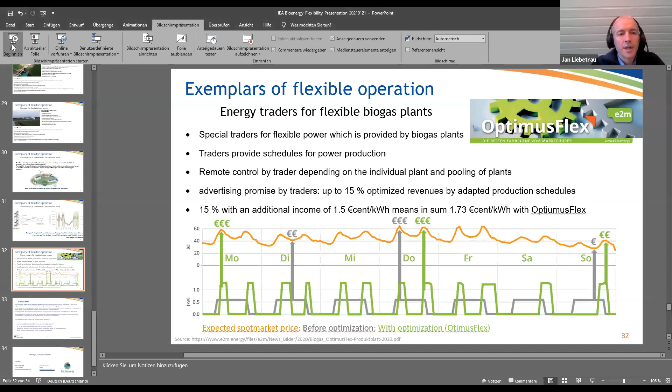Thank you very much, Jerry, for this introduction. And as already said, the idea today here is to present the report which was just mentioned. And first of all, I would like to thank all the authors of the report. Of course, it was not only me, I was leading the task, this is right, but Peter Kornatz from DBFZ, and Urs Baier from Switzerland, and Jerry and David from Ireland as well contributed to this report. It is about integration of biogas systems into the energy system.

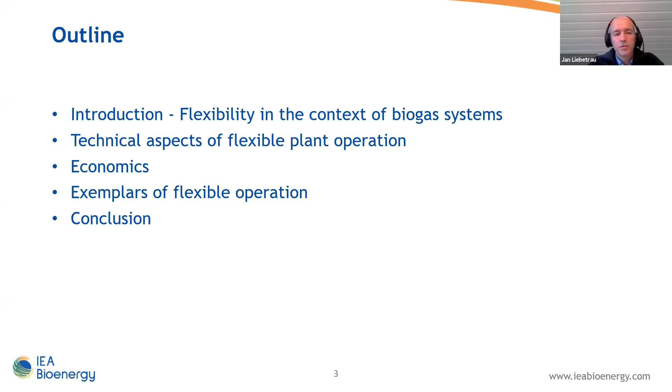And my task here today is to introduce to you the flexibility of biogas systems. So this is mainly flexibility of electricity producing biogas plants, so you have a CHP on site. And Jerry then will give the second presentation on power to gas systems. I would like to talk today about technical aspects of flexible plant operation, economics, examples of flexible operation. And of course, at the end, there will be some concluding remarks.

Why would you actually try to flexibilize a biogas plant? In the past, they have been built to have a stable, constant, stationary operation. However, the energy system is changing a lot, with more and more wind and solar in the energy system. We have a fluctuation of energy production. On the other side, we also have a fluctuation in demand. And to match this, we need flexible energy supply. And biogas can do that, unlike wind and solar. And I think this is a task for the future, that every energy producing unit has to adapt to the demand and the production in the grid.

A second option is the direct supply of a fluctuating demand of industrial facilities or other energy customers. In particular, in areas with an unstable grid situation, biogas could function as a standalone solution. And then you have to adapt to the needs of your customers or your industrial facilities. Just for the biogas plant itself, it's always good to have a shutdown scenario or even a reduction of your load. In case of maintenance, for instance, it is good if you can safely steer the capacity and the load of your plant.

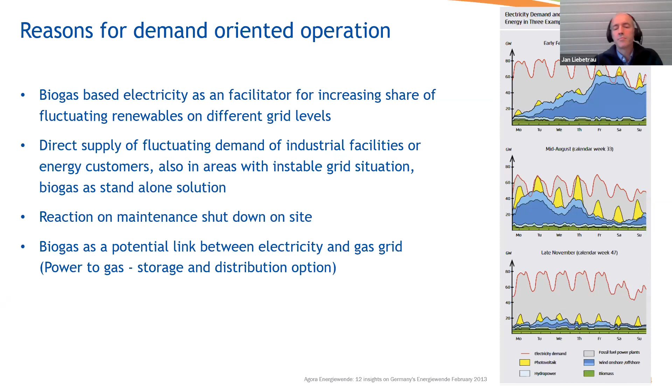And last but not least, I already said a little bit about this. We have power to gas as an option. Then biogas can function as a link between electricity and gas grid, but Jerry will look at this later.

When we go for electricity, we have different demand levels, different demand curves. If you look at the grid, of course, as already mentioned, we have wind, solar into the grid. And then, depending on how much you have this in your grid section, you might have a completely different load on the grid. And grid operators have to respond to that. And biogas can help support grid stabilization in such cases.

On the other side, of course, there's the electricity market. And this market follows these fluctuations, and the price will follow these fluctuations as well. So it's also interesting for electricity producers to produce electricity in times where the price you can obtain is high.

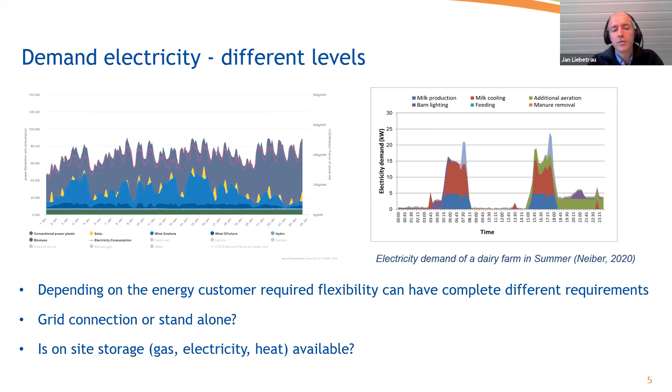And this is, of course, if you have a heat customer, a challenge to combine your flexible electricity production and this heat demand. And this is one of the tasks, if you go for flexible operation, that you combine it.

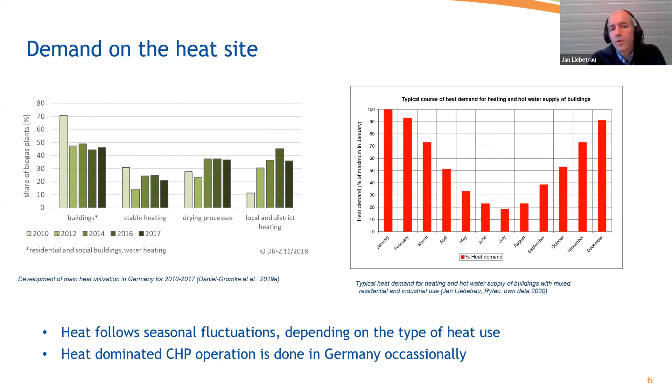On the other side, the seasonal heating scenario also offers you the option to optimize your revenues. If you produce more electricity in the wintertime, for instance, then you also produce more heat, and then you can sell more heat. And this might also be a way to optimize your revenues.

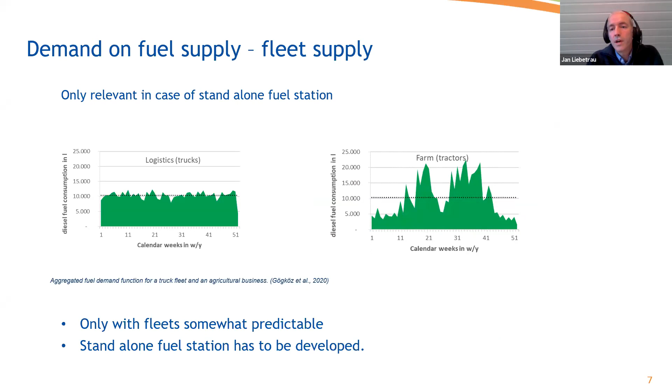Last but not least, if you have a standalone fuel station, you might also have a certain fluctuation. As you can see here, if you fuel a logistics fleet, then it might be quite constant depending on the fleet. But if you fuel, for instance, farm operations, larger farms, then of course there is a highly seasonal fluctuation, and you need to cover that with your gas production.

Summing up all these demands, in order to meet this, you need to install a certain overcapacity at your plant. Any flexibility means overcapacity in order to have times of lower production and times with higher production. And that also means idle capacity for periods of time, which means additional costs. So you have a higher technical effort because you have to organize these fluctuations, and you have idle capacity, and you need to be aware that your benefit from the flexibilization needs to balance out these additional costs.

The standard procedure for flexibilization of a biogas plant is usually the increase of the CHP capacity. Take care that your grid operator agrees to this and allows the grid access in the same order of magnitude. Increase of gas storage capacity in order to balance the changing gas utilization rates. You might also look into control of biogas production rate. I'll talk about this a little bit later.

Additional options to improve your flexibility are power to heat. Of course, the most flexible way is producing biomethane and feeding it into the grid, because then you completely separate gas production and gas utilization. And last but not least, power to gas, which will be a topic later on.

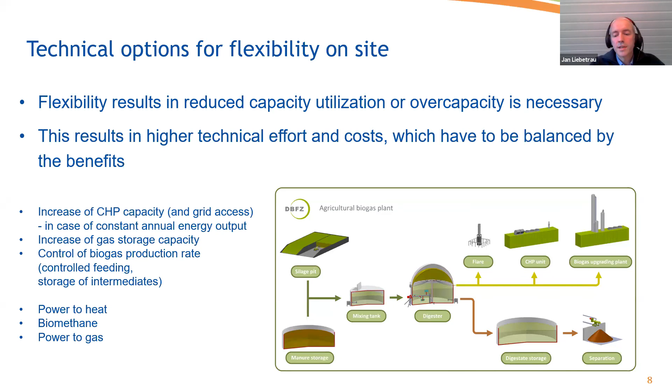The other way of flexibility is that you really react to the change in the market or in the grid situation, depending on what your target is. And then, of course, you need first of all a prognosis, somebody who will tell you how your energy provision should look in the next hours, the next days.

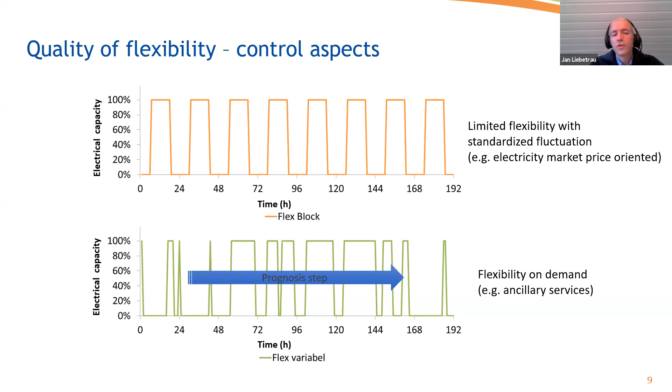And second, you need quick, fast, in best case even a remote control of your plant in order to respond to these prognoses. And here different operation modes, different scenarios are compared. The first one, the weekly schedule, is very simple. So you set on Sunday how you will operate next week, and then you can actually fulfill the requirements of markets, which are named here, day-ahead market, for instance, ancillary services. And your technical effort and your control effort is, in such a case, quite low.

But of course, this also means that you cannot really produce the electricity at the best times, and therefore the revenue will be lower than in the very right option here. This would be real-time control. Then you could even optimize your energy production during the day. You are able to take part in all markets, not simply the day-ahead market. You can even go into the intraday market, and you have the full range of ancillary services. Then, of course, you need remote control. Technical effort has to follow this, and your chances to gain money from that, to increase the revenue, are highest with such a system.

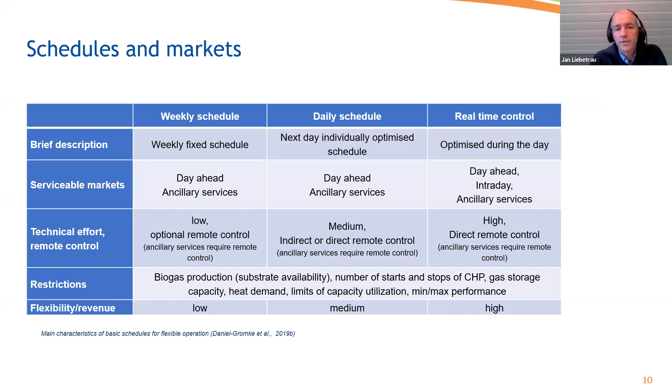Technical aspects, of course, include the capability of your CHP to run flexibly. And in the past, as I already said, producers looked at a constant operation. Now they have to actually facilitate part load operation or standby start-stop operation. And as you can see here, there are some requirements to the CHPs, but I can say that the producers very quickly adapted to this new situation, and they improved the starters, for instance, or they adjusted the startup procedure in order to be very fast online with the machine, so this has changed a lot. And if you buy a new unit today, you can be sure that most packagers will offer you such flexible operation packages.

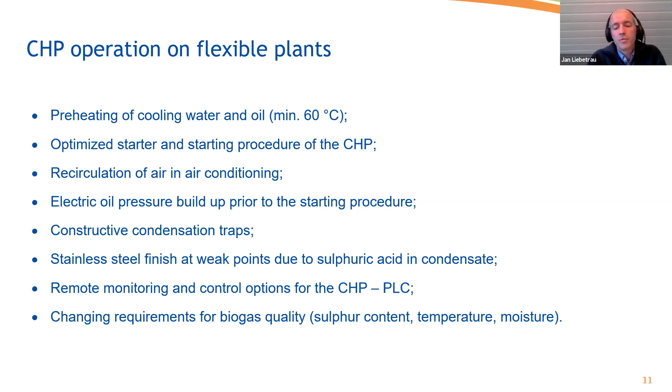When you look at CHP operation, some people might think, oh, I go for part load operation because then I don't have the start-stop issue. Then you need to be aware that the efficiency actually goes down quite dramatically. And if you look at the sometimes very slim additional revenues you get from a flexible operation, you need to look at whether this is not even eaten up by your loss of efficiency.

Second point I would like to highlight here is that the larger the engine, the higher the efficiency usually is. So if you look into flexibilization, if you think about having 2 engines, for instance, instead of 1 large engine, then you need to be aware that these 2 engines will have a lower efficiency than the 1 engine. So flexibility might also mean that you increase your capacity, have a larger engine with a higher efficiency, and this might add to your revenues. Part load operation not only reduces efficiency, it also increases methane slippage. So also from the environmental point of view, part load is not a very good idea.

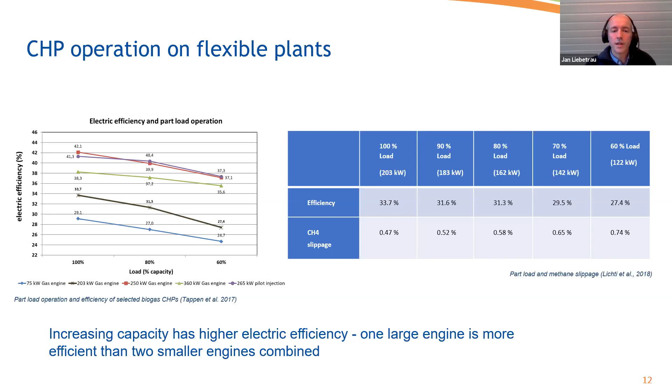When we step down in the production line to the gas storage, last was the CHP, now we go to the gas storage. The gas storage actually has the task to balance out deviation between gas production rate and gas utilization rate. In the standard stationary operation, this is not very difficult. The gas storage doesn't have to be very large. And everybody needs to be aware that the gas storage capacity is limited. However, in a flexible operation, the story is completely different, because gas utilization rate might all of a sudden exceed the gas production rate by a factor of 2 or even 3. It depends on how much overcapacity you have, or it might mean that you have no gas utilization at all, and all produced gas needs to be stored.

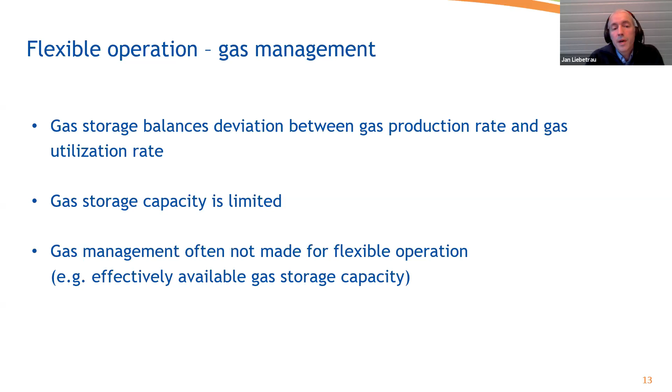At many plants which have been constructed for stationary operation, the gas management is not made for flexible operation, and it might need some upgrade in order to fulfill the demand. A very simple upgrade is, of course, to increase the gas storage. You might even think about additional clean gas storage. Very often the sensor systems for the measurement of the filling level are not very precise. So this has to be upgraded in order to have precise knowledge about available gas amounts.

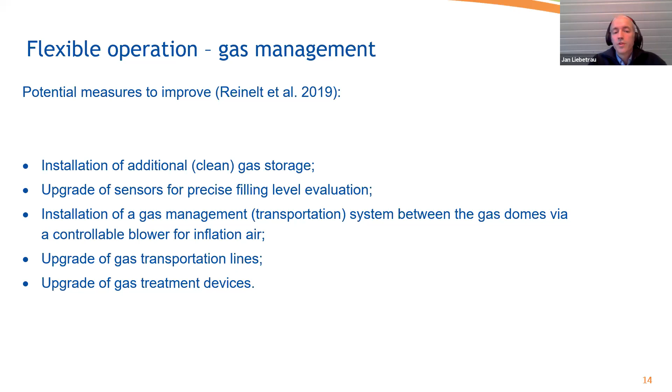Installation of a gas management transportation system between gas domes. If you have double membrane air inflated gas storages, then the gas transportation between these domes, if you have several of them, is not always 100% safe. So maybe an active gas transportation system might support there. Upgrade of the gas transportation lines in order to be able to run with the higher throughput, and upgrade of gas treatment devices, gas drying, for instance, or desulfurization. These units also need to be able to cope with the higher throughput.

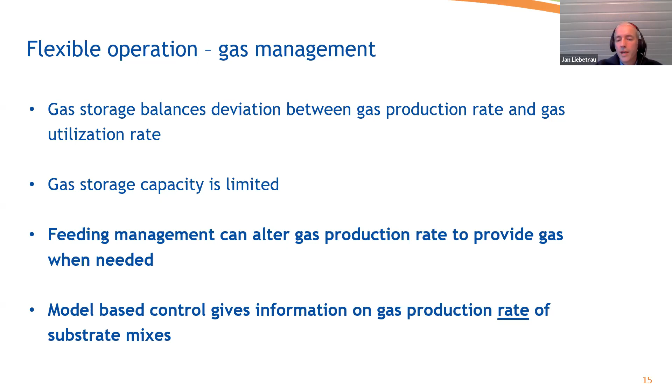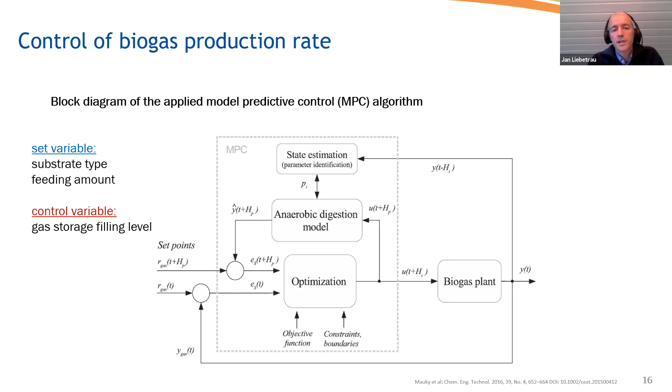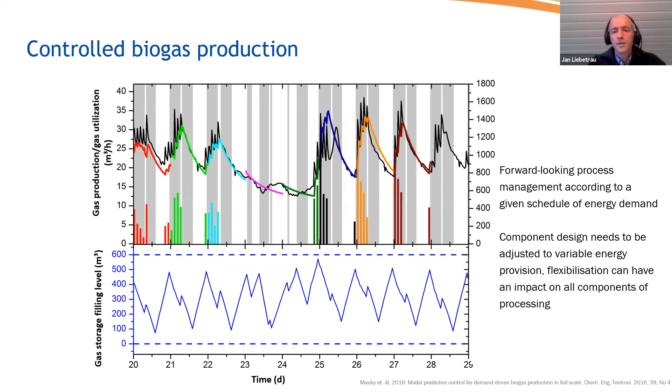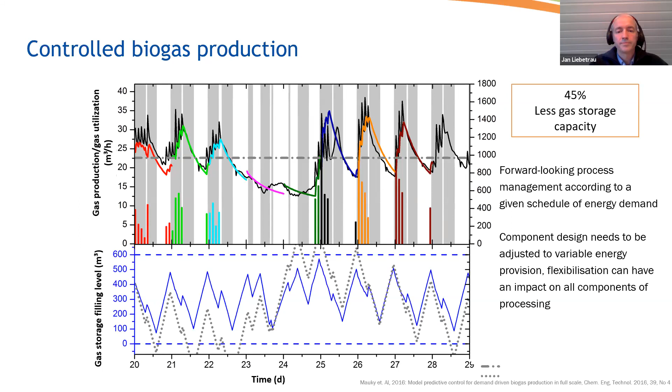And so this is going on day for day. You always have a prediction of 7 days ahead. And then the model also is comparing the actual gas production with what it has predicted in order to adjust a little bit. And you can see that the model was able to run within this boundary. Without the model, you see the dotted line here, then you would actually exceed the gas storage capacity. So you would not be able to run such a scenario with your CHP operation without this adjusted gas production rate.

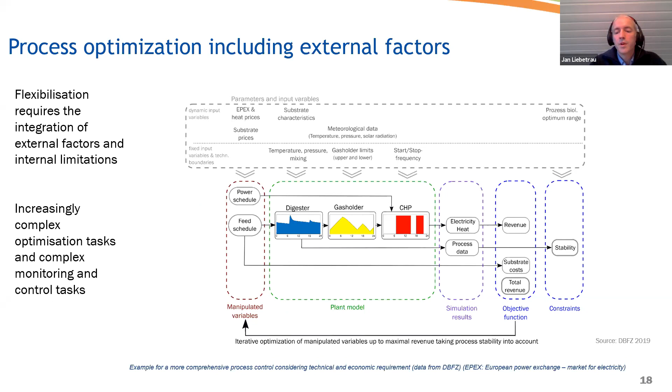If needed, or I think for full control of the overall plant, you would need also some additional variables to include in such a model. These are, for instance, substrate prices, also prices which you can obtain from the EPEX, so the electricity prices, heat prices, in order to be able to really estimate if your schedule is economically viable. So if you can actually gain profit from this, then the model, of course, needs to be much more complex and much more sophisticated.

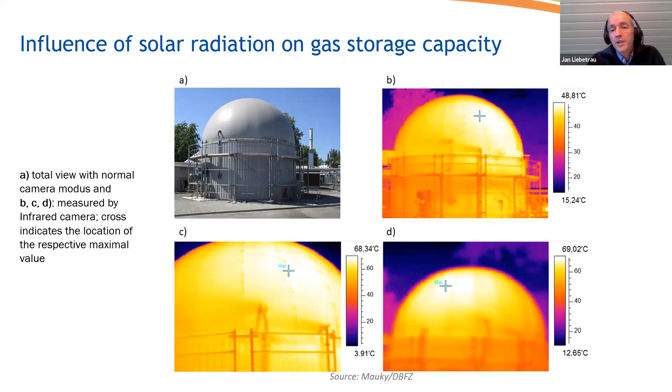One point I would like to take out here, and this is essentially the storage capacity. If the sun radiation on such a double membrane gas storage is quite high, then temperature can increase up to 70 degrees. We have tested this at this gas storage, which you can see here. And this changes, of course, the temperature of the gas inside. And if you have a change of 30 Kelvin in a day, then this can change your storable volume by 20%. This is not only due to the expansion of the gas due to the increased temperature, it's also the water uptake, which is much higher at increased temperatures. And you have to take this into account, of course, if you run your gas storage. Otherwise, you will have overpressure events and you will lose gas into the atmosphere.

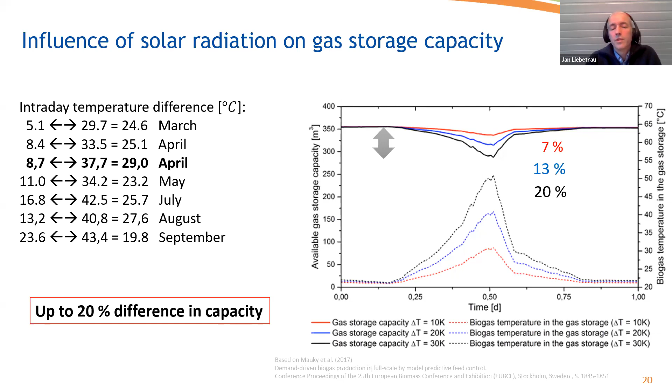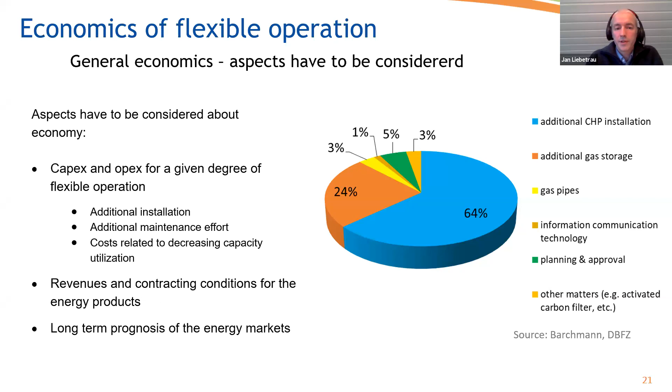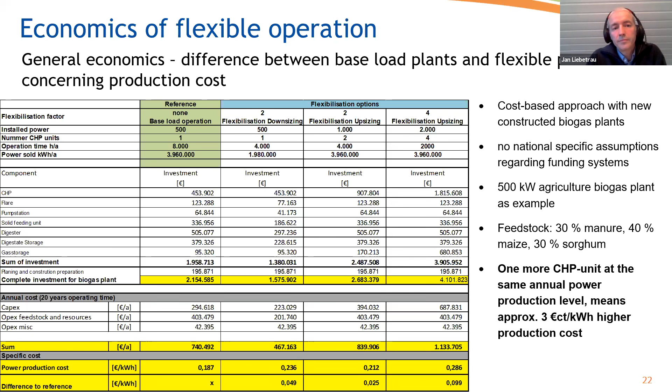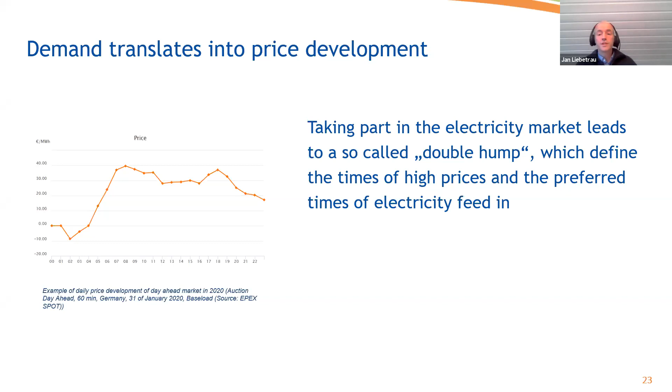And this then, of course, looks like that. At the moment, the price difference over the day is something between 0.5 and 1.5 cents per kilowatt hour that you can actually achieve there. And this is at the moment not covering these additional production costs, as I already mentioned. But of course, this will change.

So if you have, let's say, 6 hours of operation instead of 12 hours operation, then you can, of course, go even more into the maximum price. But if you have a 12-hour operation, you're forced also to take times where prices are not so perfect. And this is also not considering the winter and summer situation.

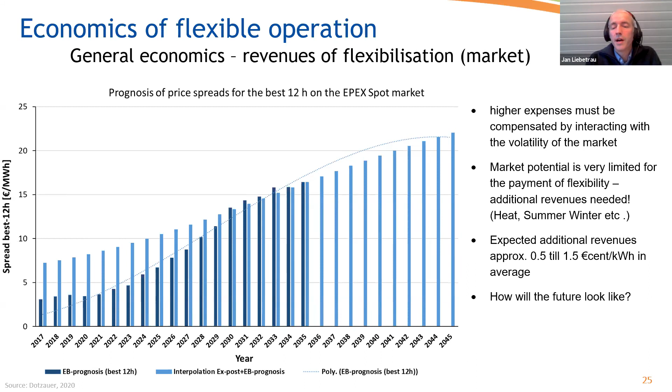If you switch from summer to winter, then you might be able to sell more heat. This might increase your revenue as well. The second point might be that in winter, electricity prices might also be a little bit higher than in summertime.

Another market, besides the physical electricity price, is the ancillary services. This is when you offer products to the grid in order to stabilize it. They have certain requirements in time and duration, and these are options where you can actually participate in this market. But this is something which is specific to the grid operator, and there you have to look into the details of your grid operation.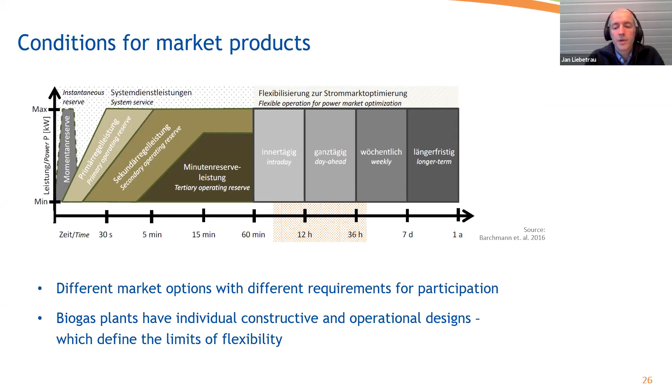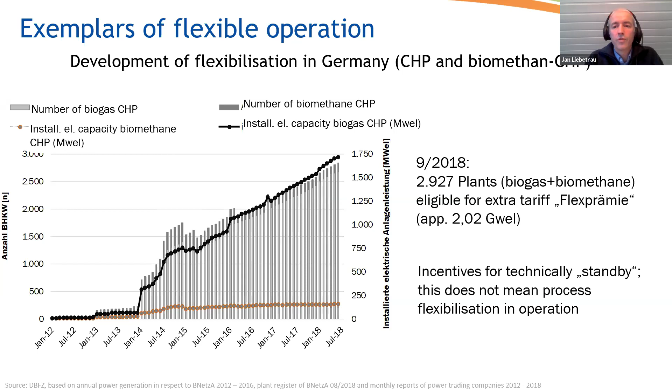Now I would like to discuss some examples. In Germany, we have extra support for flexibilization of biogas plants. According to this, we have a lot of plants already in a flexible mode. They have upgraded. However, this is more or less a technical standby. They are not forced to operate flexibly because at the moment, as already said, the revenues of such an operation are very limited. But these are 2 examples here of such plants.

They have an overcapacity, in this case here, of almost 5 times. This has been, as said, covered by this additional tariff. They have a heat storage of 1,000 cubic meters of hot water in order to store the heat which is produced during the on times of the CHP. And the revenue which is at the moment gained from this operation is something like 1.5 cents per kilowatt hour.

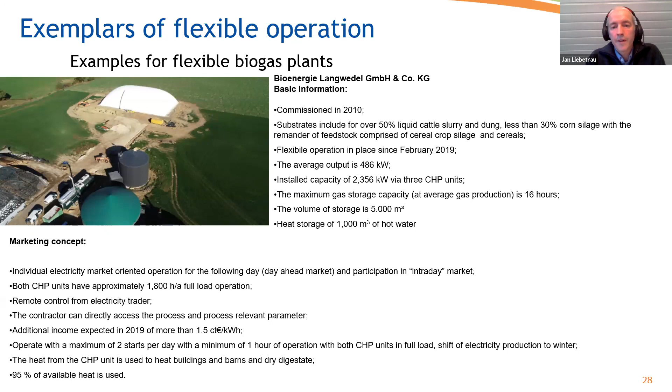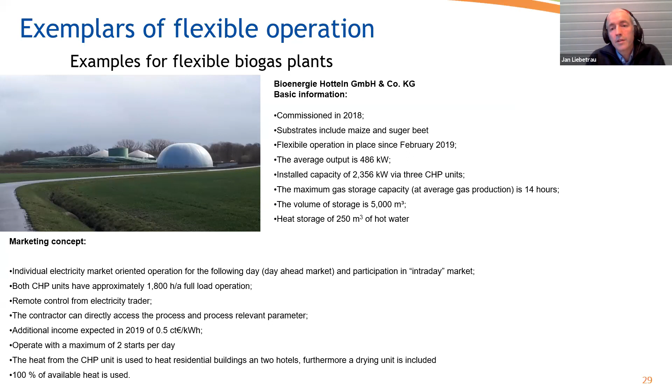The second plant is very similar. They have a little bit smaller hot water tank for the heat storage here, but they also increased their gas storage capacity, and they have had a flexible operation since 2019. I think these plants show what biogas is capable of, and I'm really curious to see how this operation will look in 5 or 6 years once the electricity market changes. This is my idea about flexible operation.

Something which is required for such a flexible operation is that the different plants have the opportunity to bundle their services. Because if you go with one biogas plant into the electricity market, it's difficult to organize your trading system, to organize that you get the high times of electricity and you steer your plant properly, things like that. This is not something a farmer could actually do very well.

That's why we have traders and companies who offer such services to the biogas plant operators, and they bundle a lot of renewable energy facilities and then trade the electricity and also offer services to the grid. This is an example of such a trader in Switzerland, which has been able to bundle around 30 megawatts of production into their portfolio.

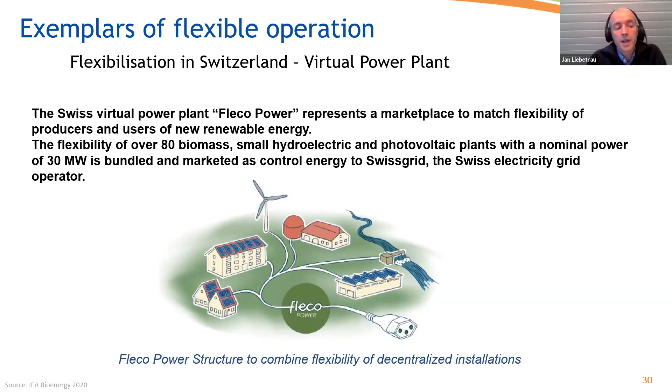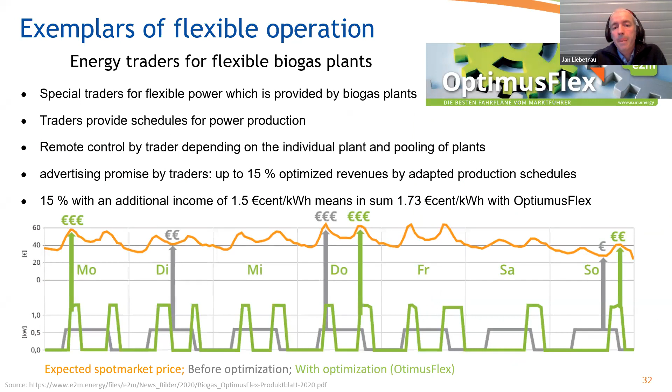And we also have such companies in Germany, and they even optimize their product and offer you an increase of the income with an optimized schedule of your biogas plant. And I would like to conclude.

In our opinion, the perception of the role of biogas has changed. In the past, it was more or less production of energy based on waste, so waste treatment was the focus. Today, we see it as a source of renewable energy, and this production function has to cope with the requirements of the new energy system. And biogas is actually quite good in offering services which the new energy system is in need of.

And this is simply due to the fact that we have photovoltaic and wind energy fed into the grid, which requires other energy producers which can produce if PV and wind are out. Biogas plant operation can be controlled extensively. I think I showed that, and this comes with a very high level of flexibilization.

And that's why we think that biogas systems can be an important tool for steering and also supporting electrical grids in the future, and also supplying heat when it is needed. Jerry will discuss in the following presentation a little bit more on natural gas substitution by means of biogas.

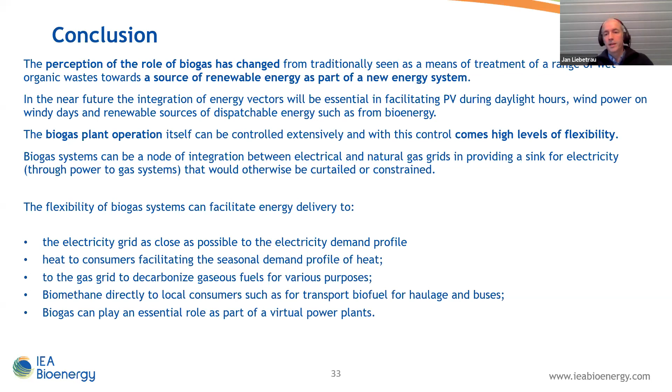And I would hand over to Jerry now and hope I kept my 30 minutes. Thank you, Jan. I might ask you to answer some of the questions. I've answered a few. If you look at the Q&A, you might try and type some answers. I'm going to do my best here to share screen. I am not the most Microsoft PowerPoint savvy. I really hope this works now. This would be nice if it works. Play from start. Jan, do you see my screen? Switch display, please. Switch display. Okay. Fabulous. Okay, thank you very much, Jan.

So my piece in this is to look at when there is too much electricity on the system and how biogas can actually take electricity off the system. So it's a very different perspective than producing electricity or energy on demand. This work is co-authored with David Wall and a lot of my colleagues in MaREI and in IEA Bioenergy. Again, this report is available for free online, and there are lots of other pieces of work and case stories there. So if you look at Task 37, IEABioenergy.com, lots and lots of data.

When we look into the future at future energy systems, we're looking at lots and lots of wind and solar. If I take Ireland as an example, examples always help. Ireland is an island and we have an island grid. In 2017, 25% of our electricity was renewable. And for 2030, we're hoping to have 70%. It's a government target. So on average, throughout the year, 70% of electricity will be renewable and predominantly from wind. We have significant sea area in Ireland, and we have lots and lots of proposals for offshore wind, floating wind.

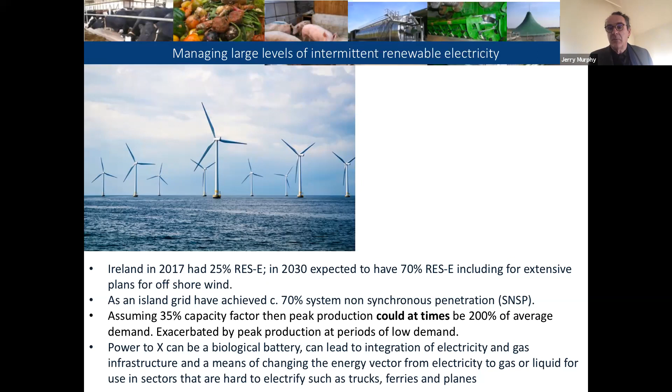So work we've been doing with my good colleagues in MaREI is we've been looking at, well, if there's a high wind forecast, it's a good time to pull down electricity because there'll be lots of wind and you'll probably capture that green electricity. Or when the price of electricity is very low, it typically means that wind is online, solar is online, and we have some of the power plants in the background.

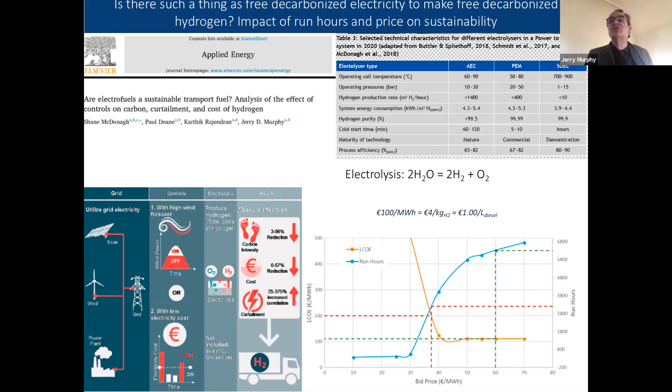So we need to have the electrolyzers operating for about 6,000 hours a year to have a cost sustainable source of hydrogen, and we can also get the curtailed electricity. And that hydrogen can be used in fuel cell vehicles, can go into a hydrogen grid, but at this moment in time, that market is not well developed. So we see great potential for hydrogen to be converted to methane. And we do that by upgrading biogas with hydrogen.

And we have an option of in situ biological methanation. So we can put the hydrogen directly into the anaerobic digester. A problem with that is that the acetoclastic methanogens are going to produce carbon dioxide. So you'll always have carbon dioxide in the output, and you would probably need a gas upgrading system. So we can use an ex situ system.

So here we have methanogenic archaea, and what those guys do is they break down hydrogen and carbon dioxide to methane and water. You need 4 times as much hydrogen as carbon dioxide, and the carbon dioxide is converted then onto methane. So we have found that if you have an ex situ system, so the biogas from the reactor meets the hydrogen, and that's the only feedstock in here, and the hydrogenotrophic methanogens produce pure methane.

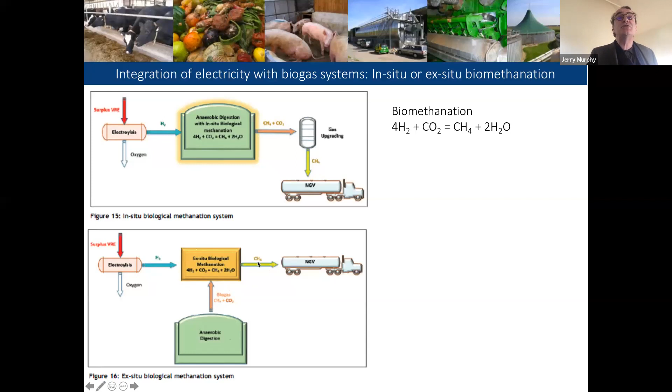So within our lab, we've looked at a number of these types of systems. So we've added hydrogen to the anaerobic reactor and found we still have CO2. The most efficient system was adding hydrogen and carbon dioxide in a batch ex situ system. So these guys here are only being fed hydrogen and carbon dioxide. And we have efficiencies over here of about 95%. So we know we can create a microbial fauna that eats hydrogen and carbon dioxide and produces methane.

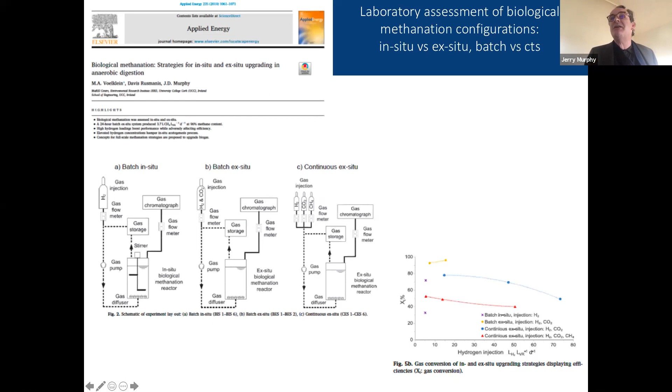It becomes more problematic in a continuous process. And it also becomes problematic when you introduce methane into the system, because you change the hydrogen partial pressure, you increase the gas flow. So this would be, for example, if you upgraded biogas to biomethane and brought the CO2 to meet the hydrogen, you have quite a simple system. However, if you introduce biogas and hydrogen, it is a bit more complicated because methane is now in there as well. So what we have proposed is a number of strategies.

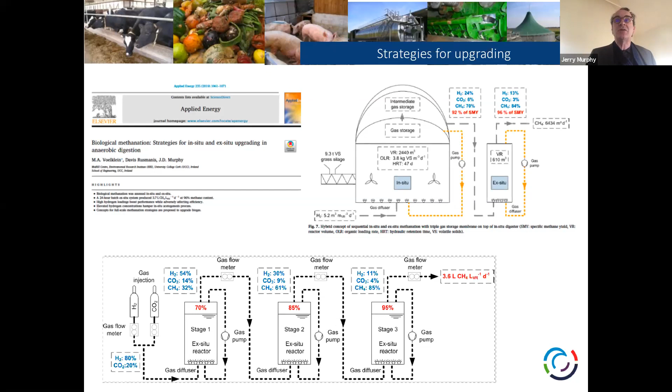We can also have a series of reactors where we're improving the ratio to get up to something which is grid quality. This is a plant that we talk about in our report. It's Electrochaea. They're in Denmark. So here we have an existing anaerobic reactor, which is producing 125 meters cubed of biogas, 75 meters cubed is methane, 50 is CO2. So again, with this Sabatier equation, we need 4 times the amount of hydrogen as CO2.

So we introduce 200 meters cubed of hydrogen that will react with the 50 meters cubed of CO2 to give us 50 meters cubed of biomethane, synthetic biomethane. We still have the 75 meters cubed of biomethane in the biogas. So we now have an output of 125 meters cubed of methane as opposed to biogas, which was methane and CO2. So we have a 67% increase in methane output. And we also have upgraded the biogas to methane, which could be put into the gas grid or could be used to run a truck.

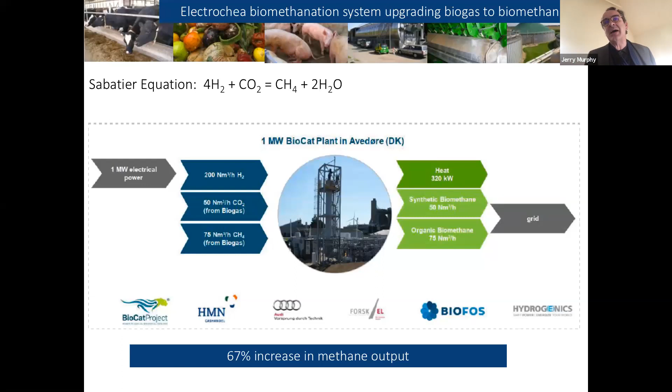Again, in our laboratory, we have looked at how sustainable is this system. So we've looked at, for example, cattle slurry and some crops having an anaerobic digester. And we've looked at the idea of hydrogen from electrolyzers to upgrade the biogas to pure methane. So we are now replacing water scrubbers or membrane scrubbers in an upgrading process.

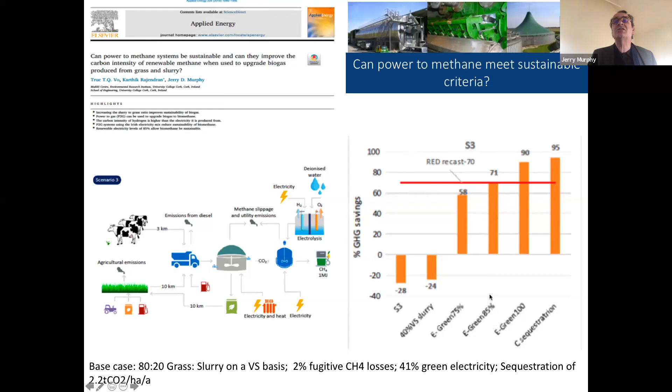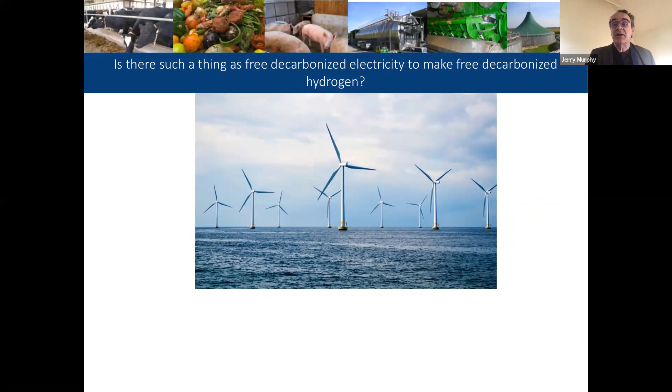And to cut a long story short, what we found, to meet the sustainability criteria in the Renewable Energy Directive, we need to have at least 85% decarbonisation of the electricity used to produce the methane. So we're really saying that it's all about electricity. If you have green electricity, you then have green hydrogen. If you have brown electricity, you have brown hydrogen. And we need those electrolyzers operating for at least 6,000 hours a year to be cost sustainable.

We're then looking at, well, can we improve this process? Can we integrate this process? So this is a project led by David Wall in MaREI in Cork, where we're looking at putting an electrolyzer in a wastewater treatment plant. So there is a wastewater treatment plant, there is a sludge digester, and in this project, we're in the Lower Harbour in Cork. There are 2 wind turbines, and the electricity is used by DePuy, but a lot of that electricity is not used on site.

So we've looked at an electrolyzer that would take electricity that would be curtailed. It produces oxygen, which goes to the wastewater treatment plant. It produces hydrogen, which can meet the biogas from the sludge digester in an ex situ biomethanation system. So we're now producing biomethane that can be used as a transport fuel.

And this is interesting because initially we have biogas, which was used to produce heat, which is maybe 2 cents a kilowatt hour of economic value. You're now increasing the methane by about 70%, and the sale value is probably 10 cents a kilowatt hour because you now are replacing transport fuel. So this can be quite economically advantageous.

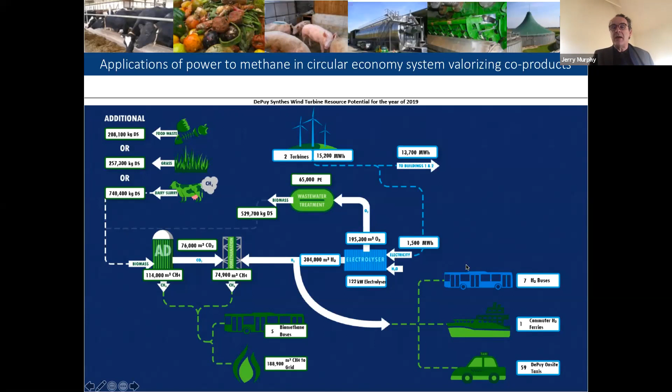We are now getting a value for the oxygen, and we're involved in the circular economy system. We also have the potential to use the hydrogen in the fuel cell transport system when that comes online in a future situation. Now, we've done a lot of work, led by Richen Lin, where we've looked at that system integrating into a bigger system.

So for example, we again have the power to gas producing hydrogen and oxygen. The hydrogen can meet the biogas to produce biomethane, but we can also take the sludge and we can pyrolyze that sludge and make pyrochar, syngas, bio-oil, so we have more energy products. But the pyrochar can go back into the anaerobic digester and can go into the biomethanation and improve the process through what we call direct interspecies electron transfer.

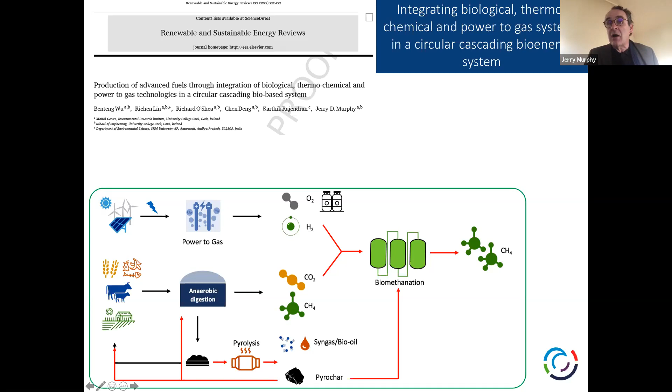So we can improve the anaerobic digestion process, we can improve the biomethanation process, and eventually the pyrochar goes back to land where it increases the soil organic content. Now it takes 100 years to make 5 millimeters of soil. So what we're saying here is the digestate can be pyrolyzed. It's almost 80% carbon. It goes back on the land. We're making soil, and then we can pull down more carbon dioxide from the atmosphere.

For example, in Denmark at the moment, they are at 20% green gas in the gas grid from large centralized anaerobic digesters. And what they expect in Denmark is by 2035, they expect to match the demand for natural gas in Denmark. And they're not using energy crops. This is typically cheese facilities, distilleries, breweries, wastewater treatment, and slurry.

But they're now looking at potentially introducing electrolyzers at these facilities, which will increase the yield of methane by up to 70%. So we have a country like Denmark that has significant targets for greening the gas grid in a circular economy system by treating waste, reducing eutrophication, improving air quality, and reducing pollution of wells. So it's very much a large integrated system.

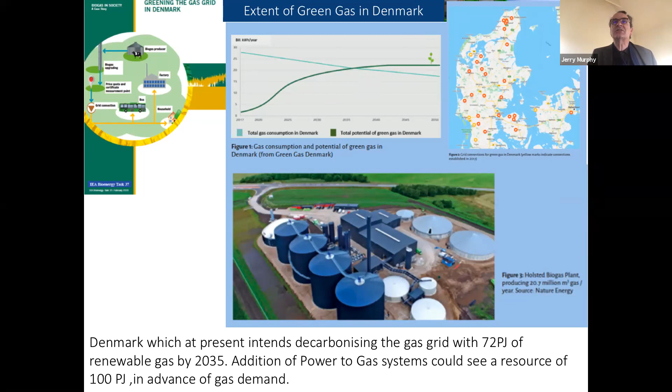And they're also looking at digestate, because if you've large biogas facilities, you've large quantities of digestate, which they can pyrolyze, reducing the amount of digestate to go to land, and producing more products. A recent piece of work we've looked at is making methanol. So again, we're starting off with anaerobic digestion and manures and straws and biogas.

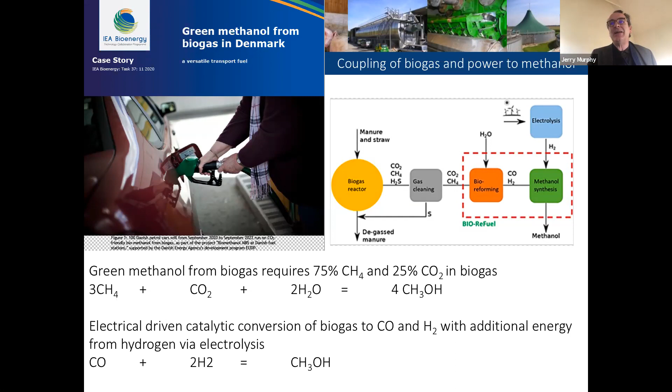But what we can do is we can have an electrically driven catalytic conversion of biogas to carbon monoxide and hydrogen, which can then be converted into methanol, which can be used in an internal combustion engine. So we now have electrolyzers producing hydrogen, biogas producing carbon monoxide and hydrogen, and together producing methanol. And I understand that Porsche are building a very large facility to produce methanol to be used in the very extensive fleet of old Porsche cars to keep them on the road and to keep them green. So it is an electrofuel in the form of a liquid.

And when we take this further, this is a plant in Germany that is proposed, Westküste. So we're starting off here with offshore wind, producing hydrogen and oxygen. The oxygen can go to cement production to make it greener. Some of the off heat can go to district heating. The hydrogen from the electrolyzer can react with the carbon dioxide from the cement production to make methanol. The methanol can be used to make biokerosene. So we now have district heating, green cement, biokerosene for aviation from offshore wind.

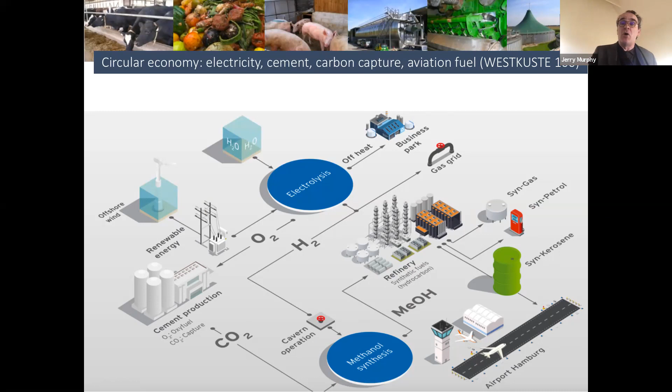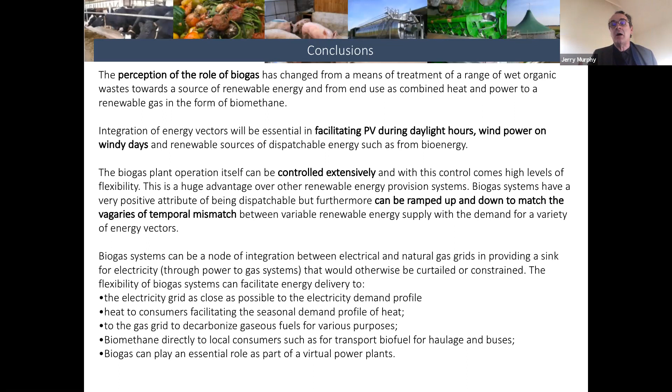So we can see that not alone can we ramp up biogas for the day-ahead market electricity to deal with the vagaries of temporal mismatch between energy demand and energy supply, but it can also be a sink for electricity that's produced at a time that it's not wanted. And we can make renewable methane, we can make methanol, and we can also go on to biokerosene. So we do see a significant role for biogas in treating waste at creameries, at food and beverage, at distilleries, at beer production, at municipal solid waste. We can react it with CO2 and we can make methane or methanol or other liquid fuels.